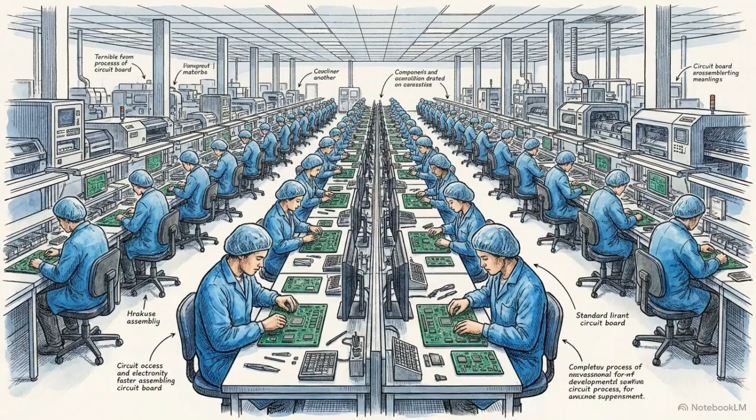Let's start with a scenario you've probably lived through. You've got a cable, you try to plug it in, and it doesn't fit. You flip it over, try again, and it still doesn't fit. Now imagine doing a physical action like that, or assembling a complex piece of electronics for 8 hours straight. The human brain simply isn't wired to maintain absolute, unwavering precision over a long shift. Eventually, fatigue sets in, attention drifts, and someone makes a mistake.

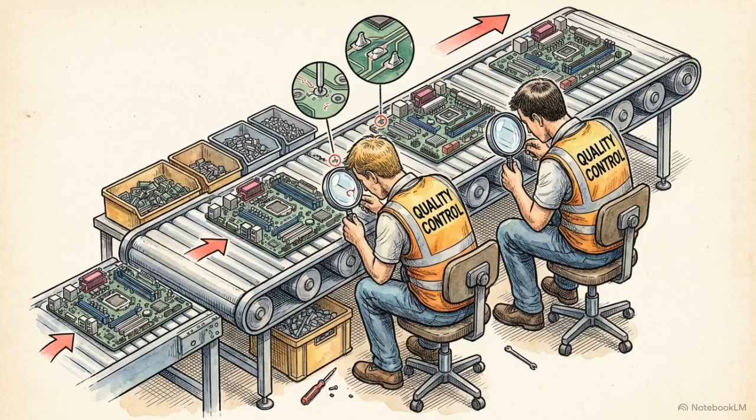The standard corporate response to these mistakes is highly predictable. A manager steps in, issues a written warning, tells the employee to pay attention, and adds another layer of manual quality control to double-check the work. In early industrial engineering, this approach of designing rules to fix the person was known as Baka Yoke, which roughly translates to idiot-proofing. The problem with Baka Yoke is that it immediately creates a culture of blame, treating a natural lapse in human concentration as a personal failure.

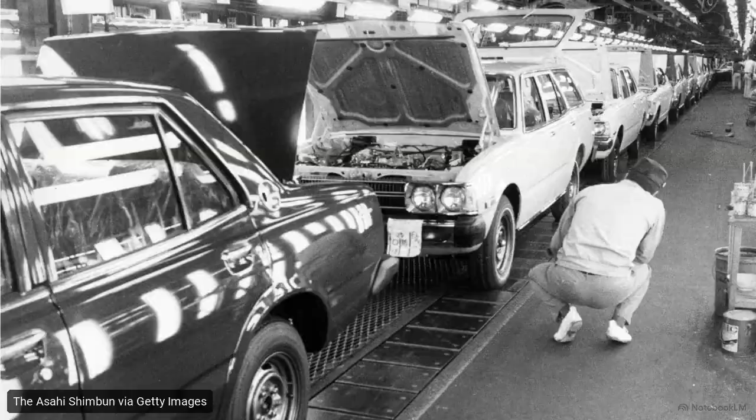Piling on manual inspections and writing stricter rules doesn't actually solve the root issue. It simply adds expensive, reactive layers to catch defective products right before they leave the building. That realization led an industrial engineer named Shigeo Shingo to radically rethink quality control on the factory floor. While developing the Toyota production system, Shingo shifted the focus away from hunting for defects after they happened and toward designing processes where they couldn't happen at all. He renamed his philosophy Poka Yoke, or mistake-proofing.

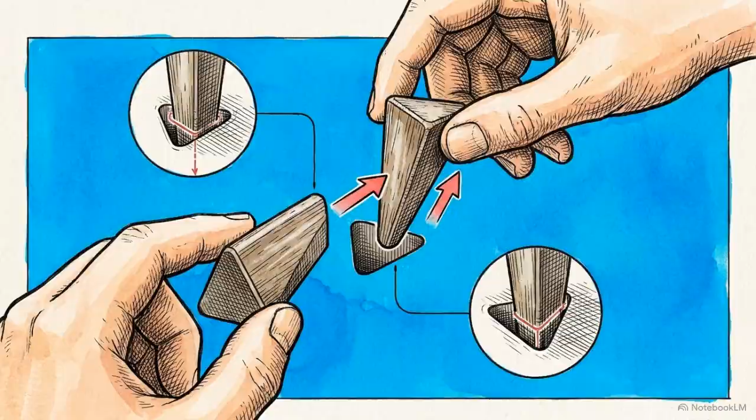The guiding principle here is simple. Accept that errors are a completely natural part of being human, but build the physical system so that an error never turns into a defective product.

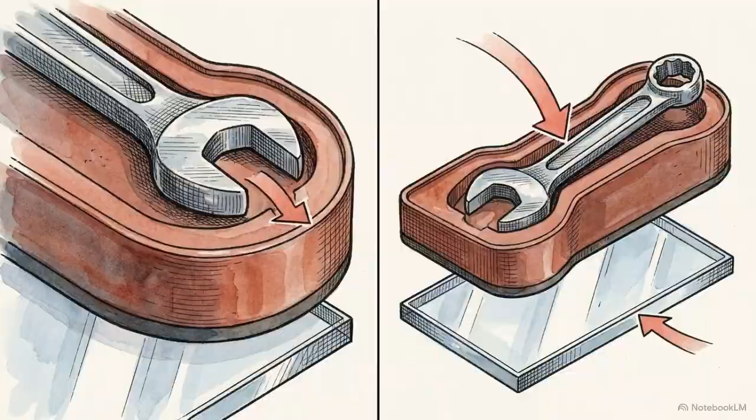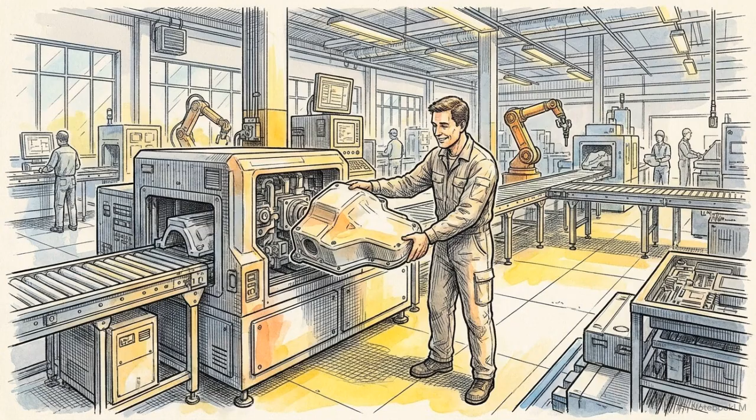Look at the SIM card in your phone. It has a single, carefully notched corner. That notch corresponds precisely to the shape of the tray, meaning there is exactly one way to insert it. If you try to force it in backward or upside down, it physically rejects the attempt. The design removes the need for you to think about orientation entirely, making the correct path the only available option. This is the essence of Poka Yoke. It stops punishing workers for their humanity and starts protecting them with smarter engineering.

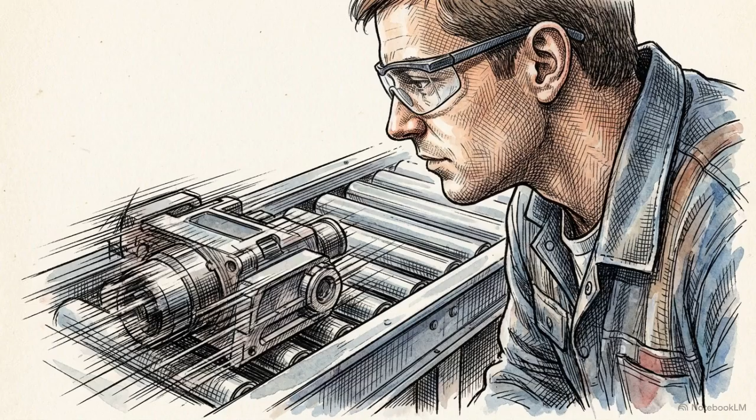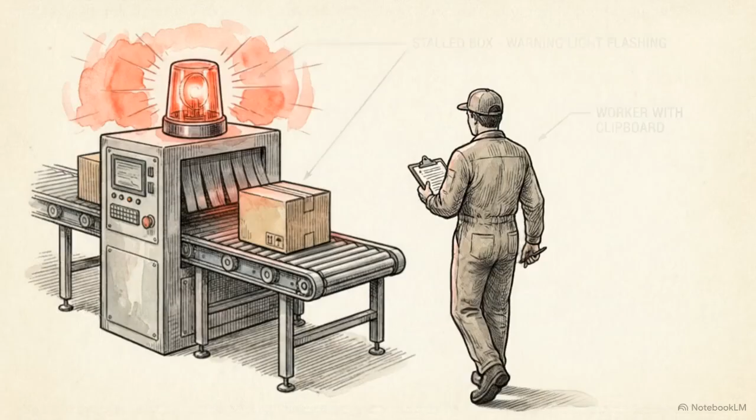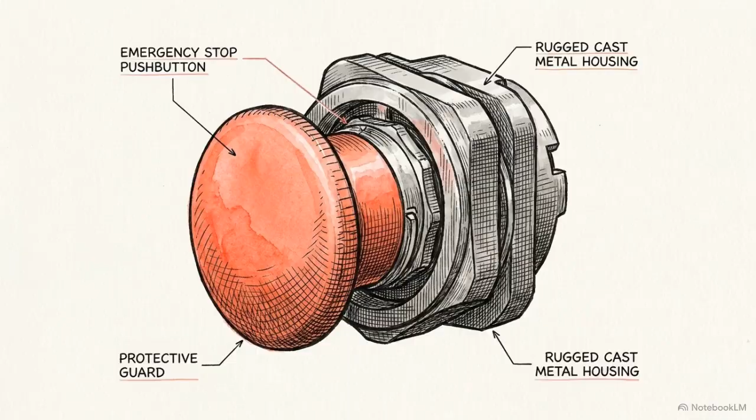It's a helpful safeguard, but it has a massive vulnerability. It still relies on a human being to notice the flashing light, care about the warning, and manually pull the box off the line. To remove that vulnerability, engineers step up to level 2, control. This tier uses physical logic to actively halt a machine or a process until the operator resolves the detected error.

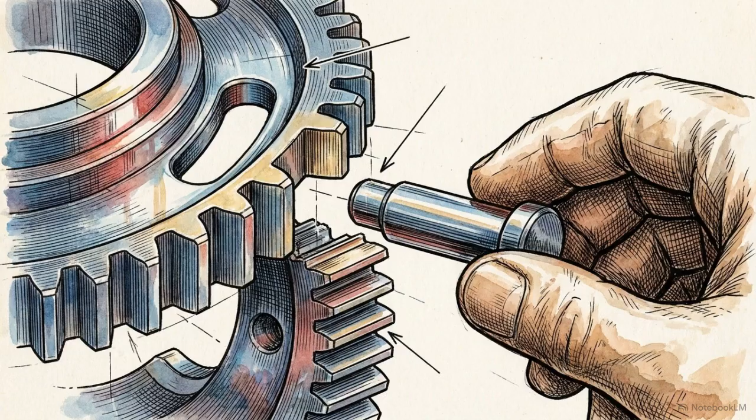A classic application is the 2-hand control on a heavy industrial press. To bring the press down, the operator has to use both hands to press 2 widely spaced buttons at the exact same time. It's a hard stop that ensures their hands are safely out of the crushing zone before the machine will activate. We see this same logic in our kitchens.

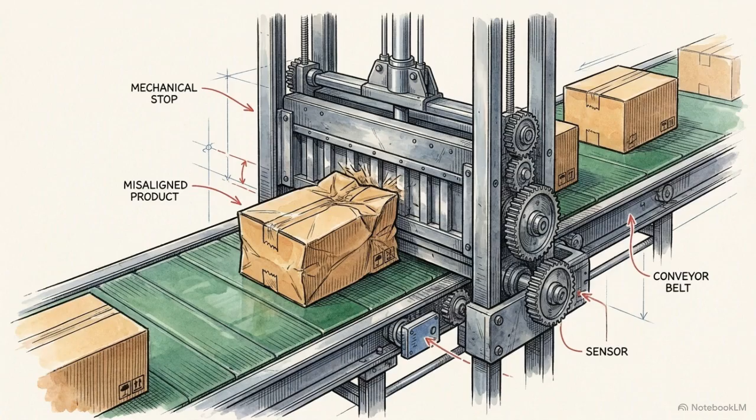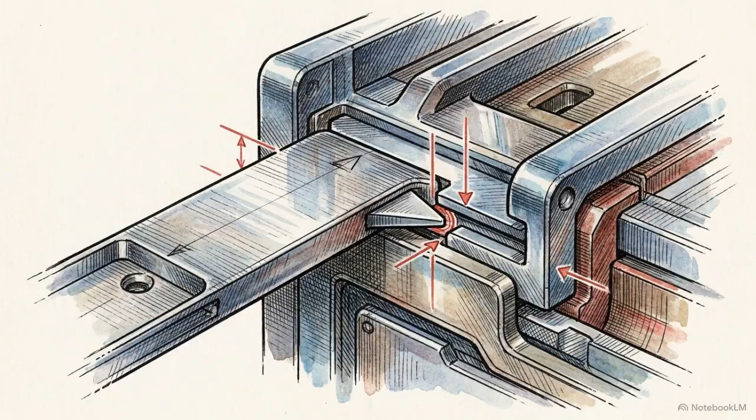That brings us to the ultimate tier of mistake-proofing, level 3, elimination. This is where engineers rethink the physical geometry of the parts themselves so that making a mistake becomes physically impossible. To see the financial impact of this, consider a typical consumer electronics factory. Let's say a manufacturer is facing a crisis. Thousands of their appliances are failing in the field because workers are accidentally swapping the internal power wires during assembly.

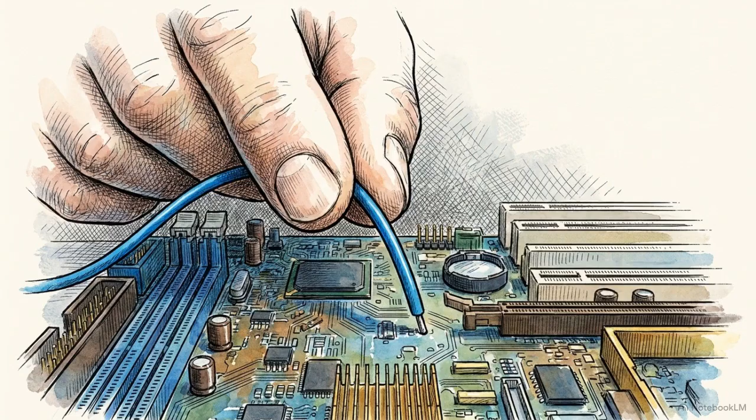This diagram highlights the root cause of the flaw. The assembly requires plugging a blue wire and a brown wire into a motherboard. But both wires use the exact same size connector, and both ports on the board are identical. After wiring 1,000 units, a fatigued worker will inevitably plug the blue wire into the brown, identical slot.

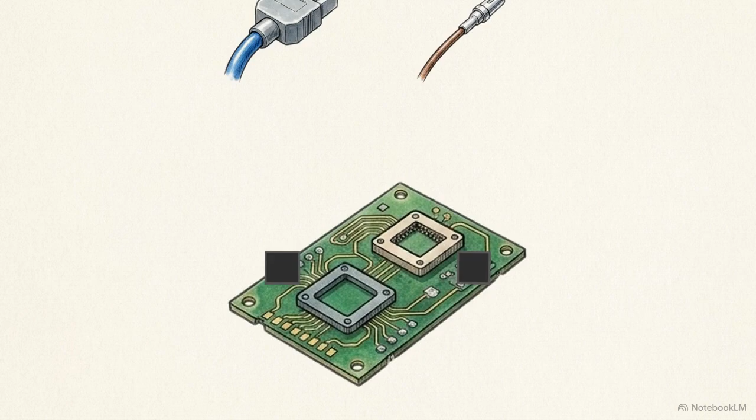Instead of hiring more quality inspectors, an engineer applies level 3 elimination by changing the parts. They source a wider connector for the blue wire and a narrower one for the brown wire, modifying the motherboard ports to match. Now, if a worker tries to plug the blue wire into the wrong port, it simply will not fit. The error rate drops to 0 permanently.

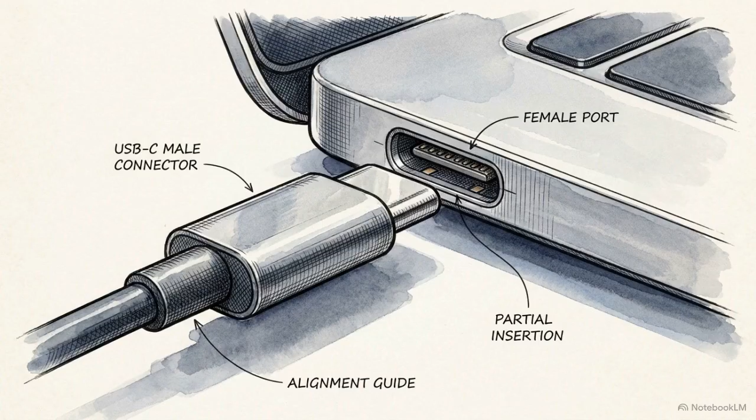Tech companies have applied this exact same logic to consumer cables. The old USB-A connector relies on an internal plastic block to prevent you from inserting it upside down. It's a level 2 control. It stops the error, but it often requires you to fumble and flip the cable before you get it right. The USB-C connector eliminates the possibility of an orientation error entirely. By making the geometry completely symmetrical, there is no wrong way to plug it in. The design solves the problem before it can even happen.

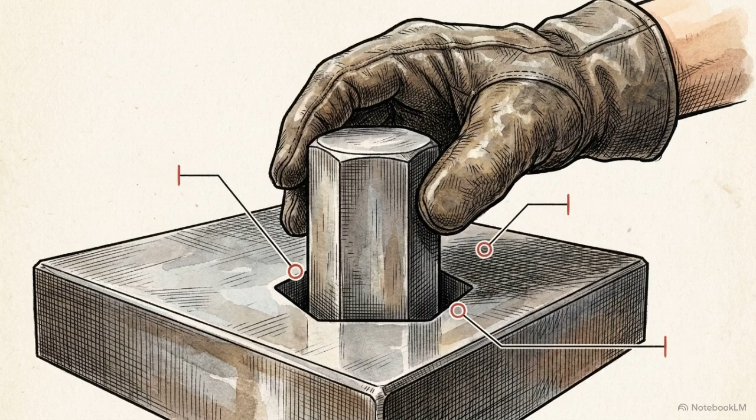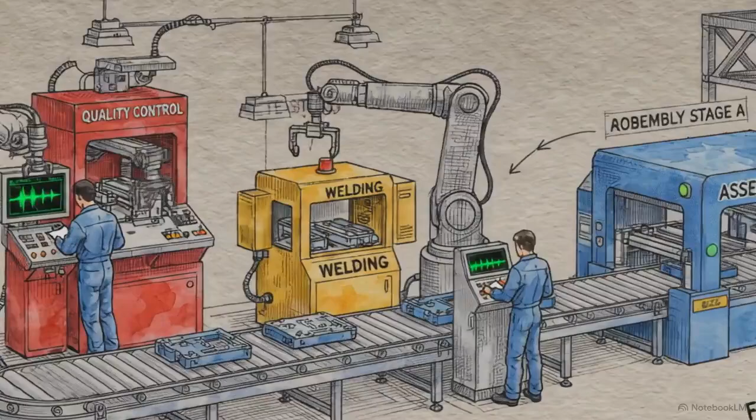The most brilliant Poka Yoke mechanisms rarely involve expensive robotics or complex software. They rely on simple, cheap geometry to guide the user naturally toward the correct action. When a factory successfully implements these mechanisms across its entire production line, it reaches a state Shigeo Shingo called zero quality control. The system itself is so inherently robust that random end-of-the-line inspections become an obsolete practice.

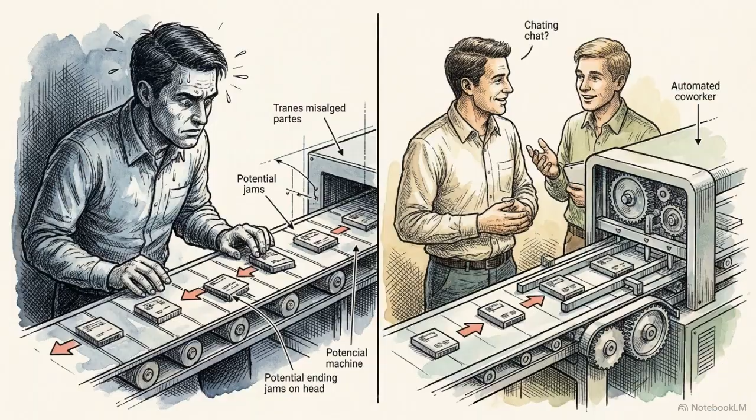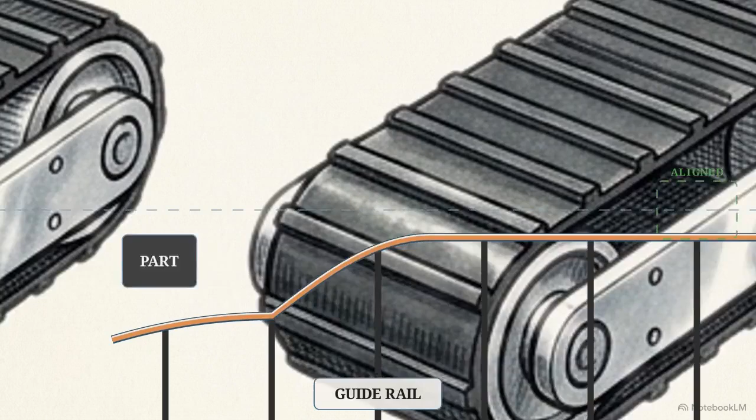Building quality directly into the process eliminates the high costs of scrap, while simultaneously reducing the psychological pressure on the workforce. Operators no longer have to spend 8 hours a day in a state of hypervigilant anxiety, terrified that a single momentary lapse in focus will ruin an entire batch of products. These invisible physical constraints act as a safety net, allowing people to work quickly and confidently while protecting millions of dollars of machinery from inevitable human fatigue.

We even rely on this safety net when we fuel our cars. This diagram shows why you rarely hear about someone accidentally filling a standard petrol car with diesel fuel. The nozzle on a diesel pump is physically thicker than the opening of a standard unleaded gas tank, creating a mechanical barrier against a catastrophic engine mistake.

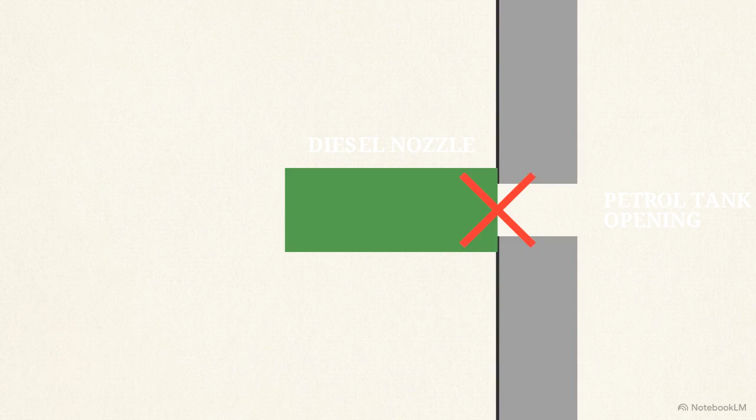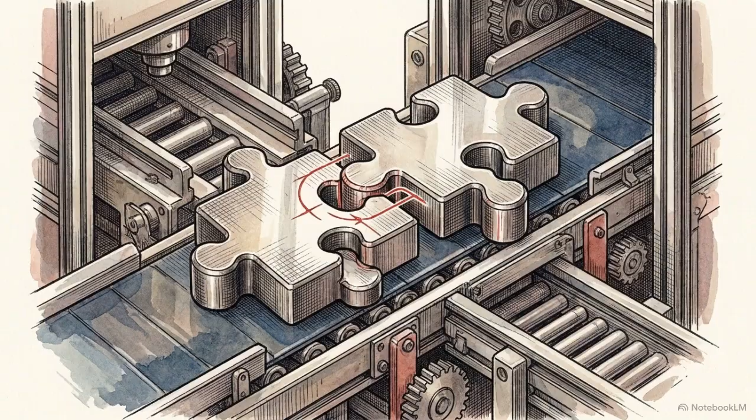At its core, Poka Yoke is an exercise in empathy. It recognizes that humans are brilliant, creative, and inherently imperfect, and it chooses to perfect the process rather than demand the impossible of the person.